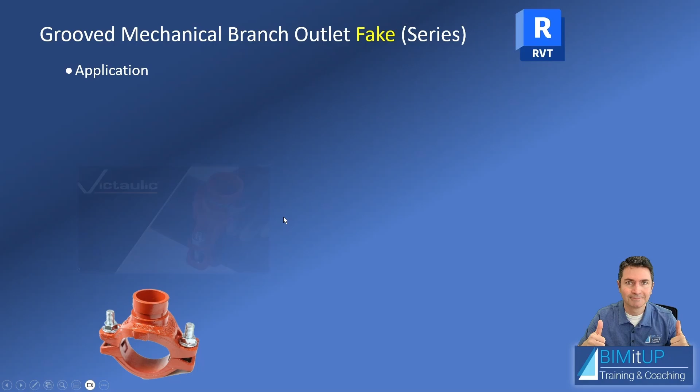This is going to be a series. So let's talk about the application of these mechanical branch outlets. These are widely used to come out of your sprinkler main up to your sprinkler branches. So this would be facing upwards, then you would have a riser nipple, and then you would turn right or left depending on where you want to take your branch. Or sometimes contractors tee out of it. Some designers don't like it too much and they still prefer welded outlets, but especially contractors love them because they save them a lot of time.

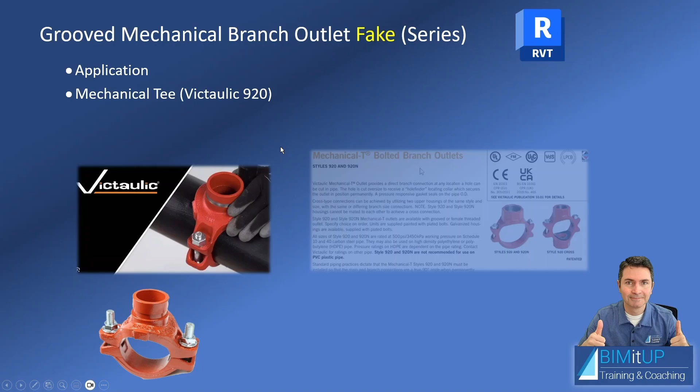One of the leading manufacturers for this is Victaulic, and they have the 920 series, which comes in two flavors. You have your mechanical T, which is this one, and then you have your mechanical cross, which is essentially a double T. So in this video, I'm going to illustrate the challenge of using the manufacturer's family. And then in the next video, I'm going to show you how to fake it so you can use something in place of this that is not perfect, but it's an option, to get the job done if you're struggling with it. So I hope this helps you out.

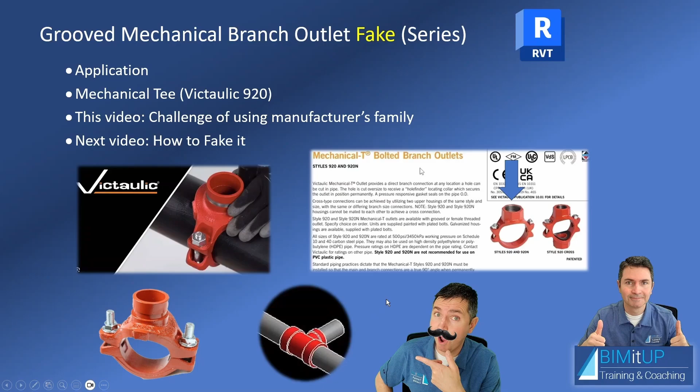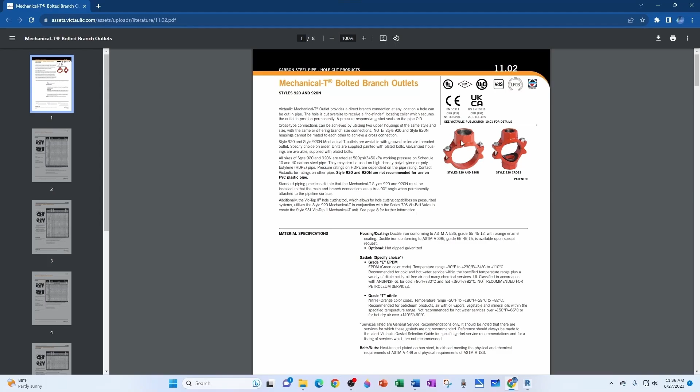Let's get started. Okay, so I went to the Victaulic website and I downloaded this spec sheet for the mechanical T style 920. It includes both the outlet style and the cross style. And I also downloaded the Revit family for both. This one's for the outlet and this one's for the cross.

As you can see, those are beautiful families, very aesthetically pleasing, but it can be quite confusing, and I'm going to show you why. Let's create a project, file, new project.

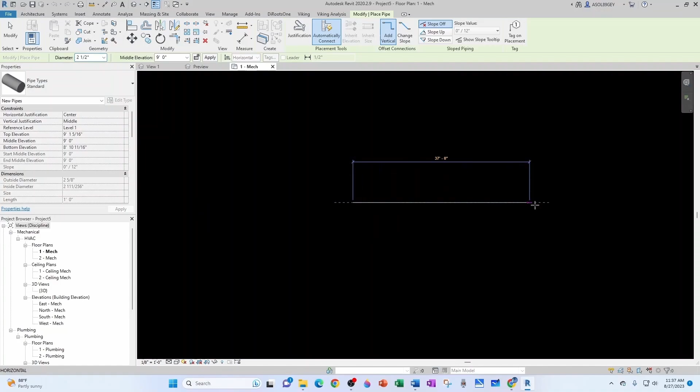Let's use the mechanical template to keep it simple. And let's just draw a pipe. So PI, I'm going to use the standard pipe type. And let's say a 2.5 inch pipe. I'm going to change my detail level to fine. I'm going to zoom in and I'm going to try to load that fitting.

So let's start with the T, which is the simplest one. So load into project, okay. Let's not try to dump it into the pipe for now, let's just dump it outside. And the first thing that you notice is that when I click on it, I don't have any connectors available, right? As opposed to, for example, a standard T.

Let's go to families, pipe fittings, T generic, let's drop the standard here. See, when you drop a fitting like a T, you have your connectors here, so you can right click, draw pipe, and then start a pipe, right?

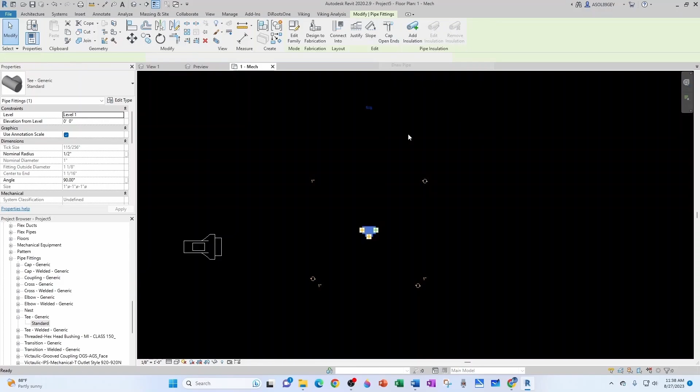So the first challenge that we encounter is that if you right click here and you do edit family, you can see that this family is categorized as, if we come here where it says family categories and parameters and click there, that's a pipe fitting, but the part type is categorized as a T, right? So let's close out of here.

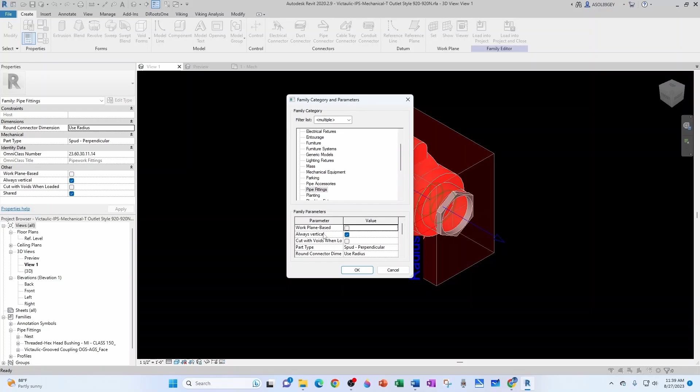And now let's compare to this family. If I go back to the original family and I go into family categories and parameters, it's still a pipe fitting, but the part type is defined as a spud perpendicular. See? So, okay, you would think, all right, I'm going to go back to my project and then I'm going to try to use it as a tap.

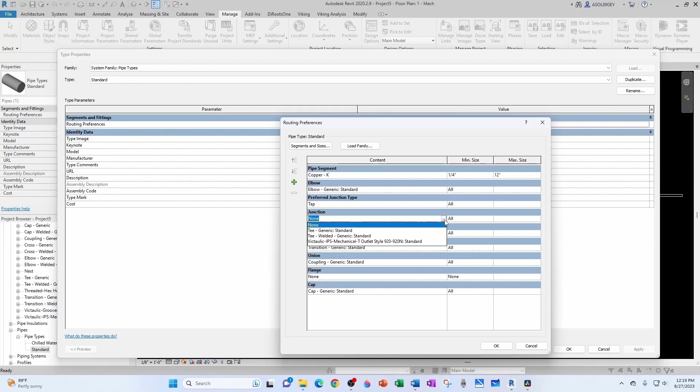So let's compare the behavior. Let me go back to pipes, pipe types, standard, right click, type properties, and then on my routing preferences, I change from T to tap. And then as junction, I select my Victaulic 920. I'm going to click OK, OK.

So let's do another pipe, PI. I'm going to keep my 2.5 inch. I'm going to do it at 8 feet of elevation just because I want to. I'm going to do create similar, and I'm going to change my pipe size to 1.5 inch, and I'm going to try to come down. So that's a little bit more like it. I'm going to delete this, but then you can see that it's not quite what I'm looking for.

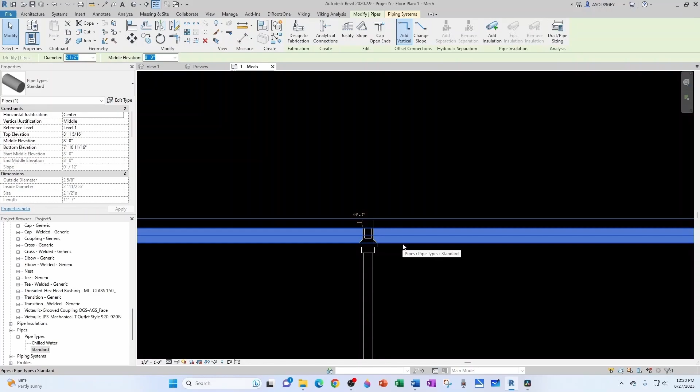This was a 2.5 inch line, and then this tap seems to be a lot bigger. Even if I go to 3D, let's go to 3D view, you can easily see that that's not what we're after, right? This is huge compared to our pipe.

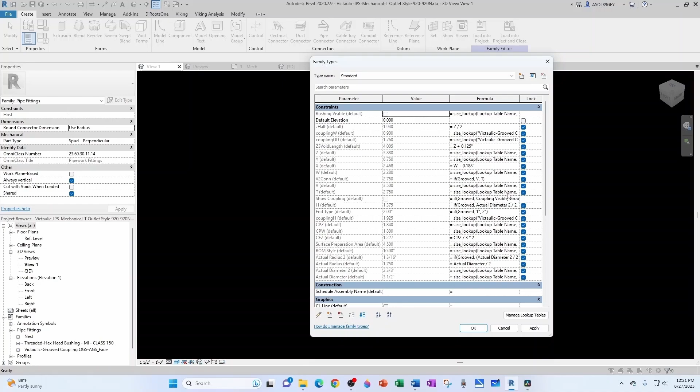So you could try going back to the family and trying to find out what's going on, but then when you go to your family types, you'll see that all these parameters are all formulas, and you see it's calling for a lookup table, and there's different lookup tables. And then if I go here to manage lookup tables, you see 3 different lookup tables. So as you can see, it can be quite confusing.

And imagine, this is just the outlet. If you go to the cross, now you have more parameters because you have 2 branch outlets. So what I'm proposing here is very simple, and I'm going to walk you through it.